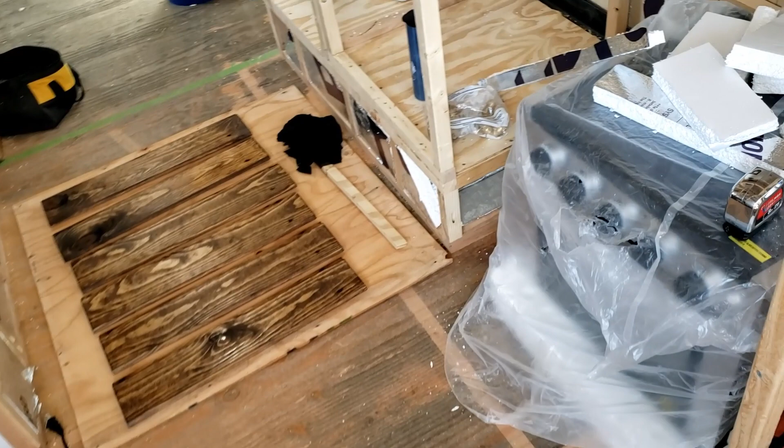Before I get started here, I've got to do some cleanup, so just figured I'd show you guys. This is the stained panels from the last episode. They've been sitting here drying for a couple days and they are looking good. Yeah, that looks great. I actually really like these dark spots over here. The plumbing's running from over here through the wall. That's our hot water heater. So it's going to run to that, and then past that, the shower goes here.

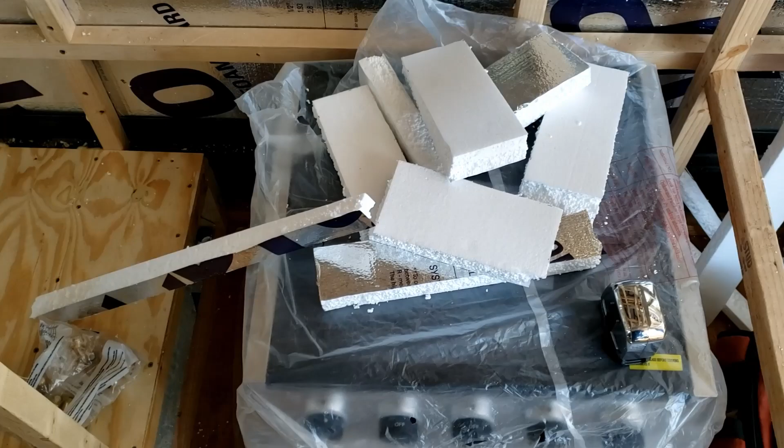So I've got some cleanup. I've got to move this oven. I've got to move these wood panels. But yeah, it'll go here. There'll probably be a run up to the shower head, which I still haven't determined yet. So I'll probably just put some T's somewhere in here that it will run up.

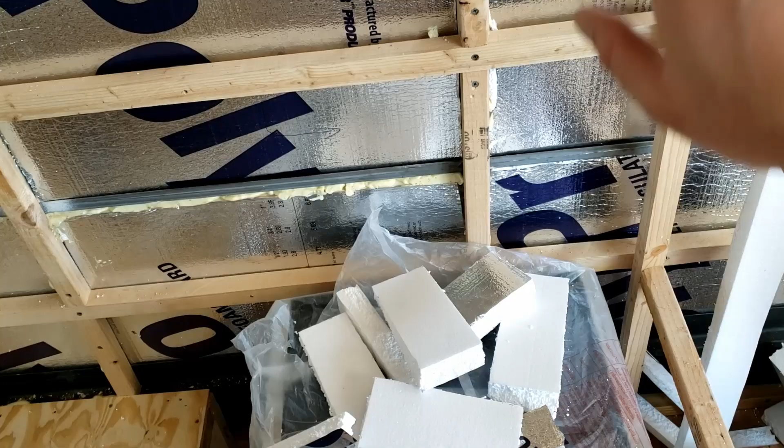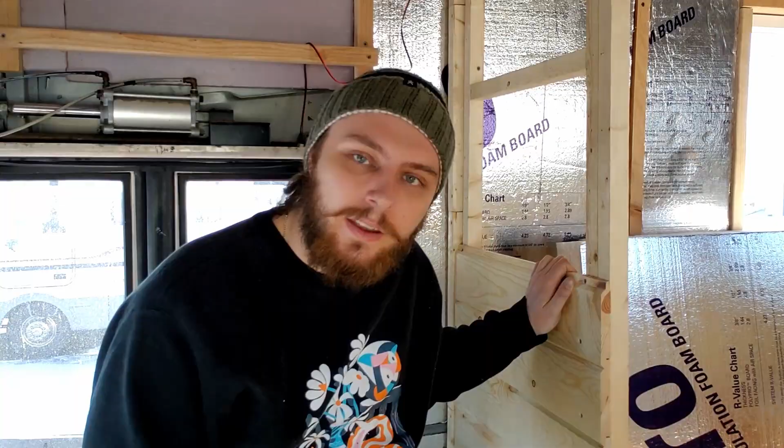We'll see. So I've got to do something with those panels I stained, so I'm going to just reinstall them in the place they go. They're not finished staining. I still have to stain the backside, but for now they need somewhere to stay, and I don't want them in my way. I don't want to bump into them or scratch them with my feet or anything. It'll be cool to see because I'll be able to see the contrast between this color and the stained color.

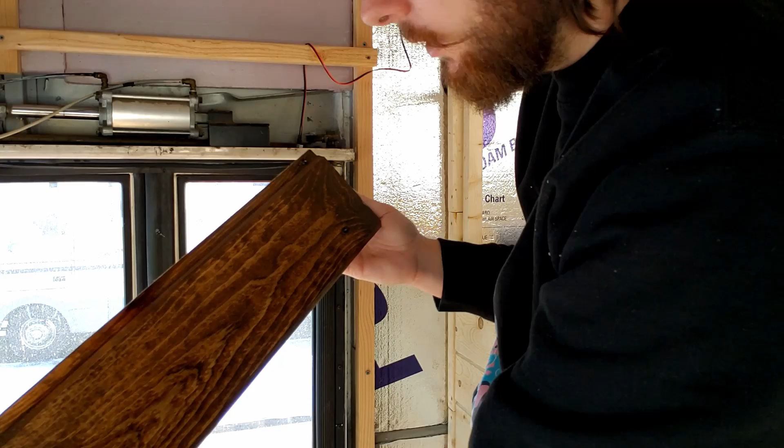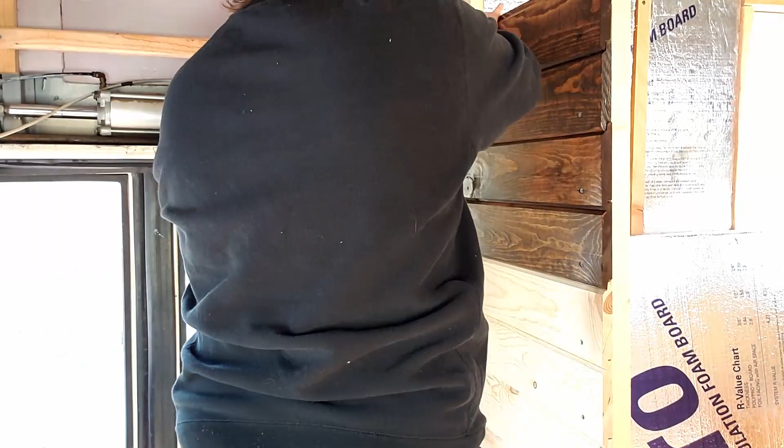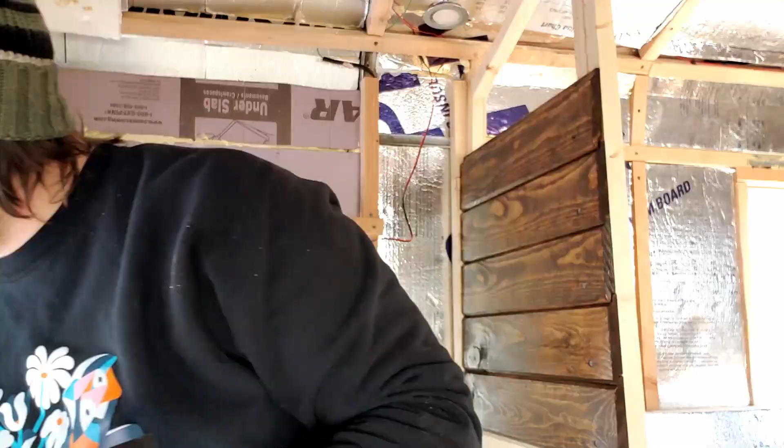Look at that. Already looking pretty good. All right, that looks pretty good. Let's see if I can get both colors here. Yeah.

So if you're watching and you see this, let me know what you think. Do you like the unstained or the stained version? I really like the stained version, and I've got a whole gallon of this stain, so I will probably stain a lot of it. But I mean, I'm open to not. So we'll see what happens.

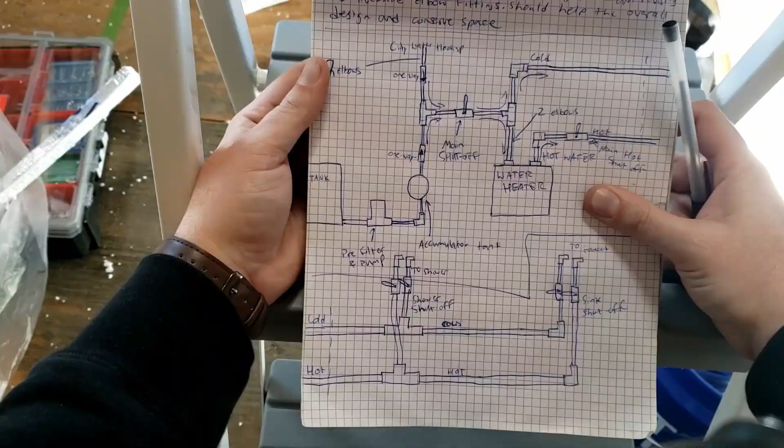So here's my plumbing diagram. I've looked up a lot of stuff on it and kind of wanted to draw my own. So I'll start at the beginning here. So we have the water tank, this is city water, this is the water tank. So if I'm somewhere where I can hook up to water, I can fill up the tank through here. It won't go this way, there'll be a separate thing linking to the tank.

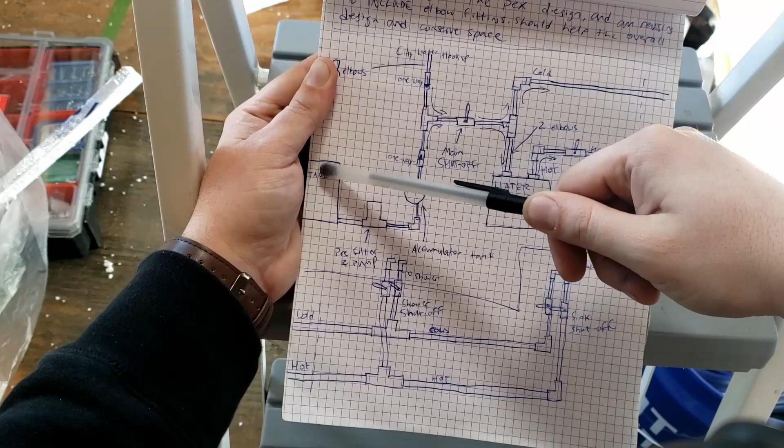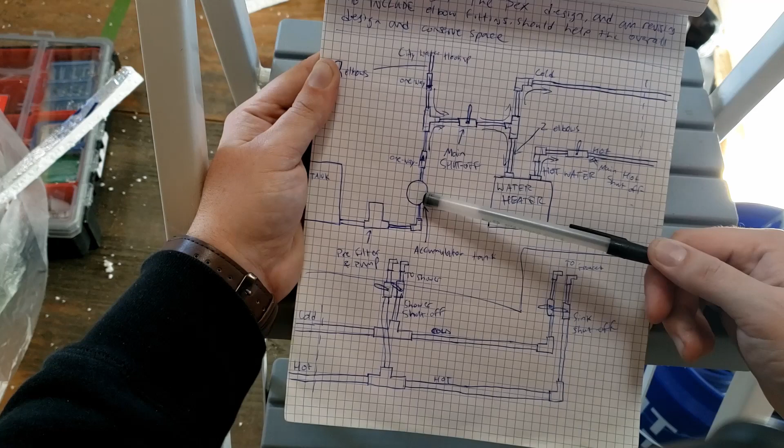Anyways, this is the pump and filter. So basically there's a filter that goes before the pump to prevent any particulates from damaging the pump. That gets attached to the pump. Got an elbow here. This is the accumulator tank. Basically what this does is it holds pressure so you constantly get the same amount of water pressure. Because the pump works in bursts, whereas when you turn on the faucet you don't want it to sputter when the water comes out. So this will keep it at a constant steady stream.

Then we have one-way fittings. These prevent water from going the opposite direction. So again, I've got the pump going into the accumulator tank, going one way. So the pump can only pump water this way. The reason that's here is because I've got city water too, and if I want to be hooked up to city water and not using the water in my water tank, you don't want the city water to pump backwards through your pump.

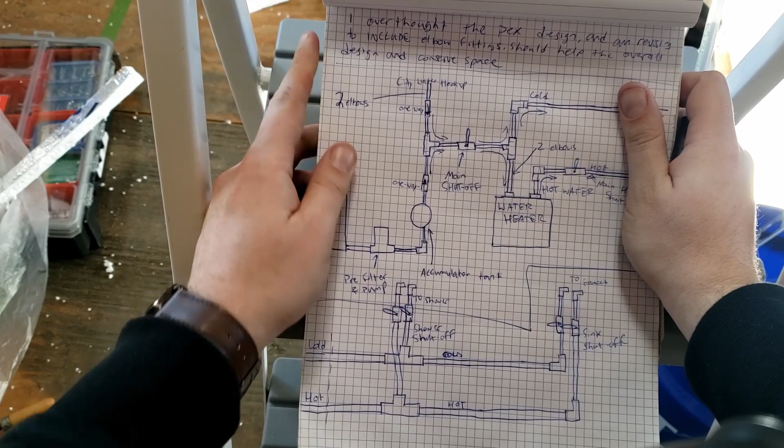So I've got a one-way here and then a T. And then here's the city water. I've got a one-way going in that way. So we have water coming from both directions, but they cannot go out. Now next is the main shutoff, which will just be a big turn valve. And then another T. This is just the cold spigot.

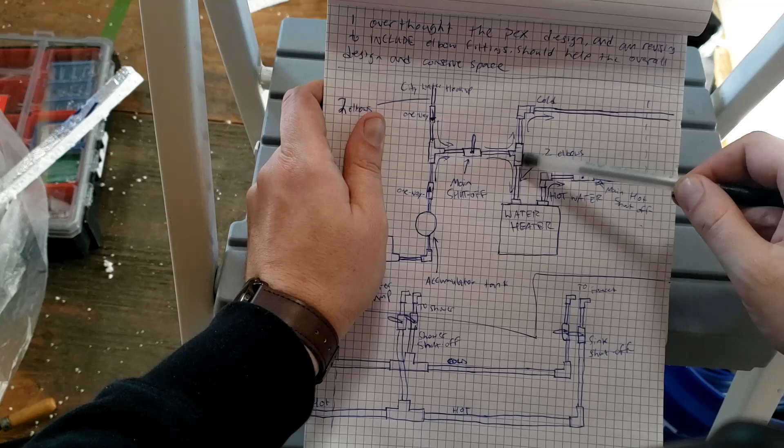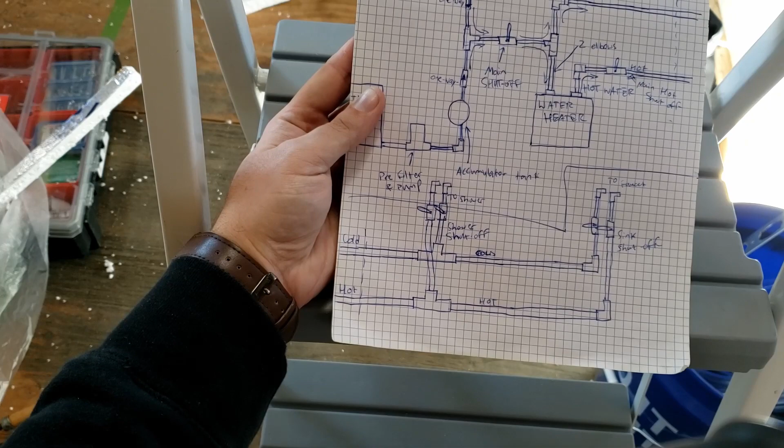So, you know, you got cold water coming, it goes through here or through here, sent to your sink and shower. The T here leads to the water heater. So cold water goes in, hot water comes out. I'll have a main hot shutoff. So we have a cold and hot water line. There's a T going up to the shower for both cold and hot. Elbows going to the sink with shutoff valves for both the shower and the sink. That's the plan anyways. Now it's time to execute.

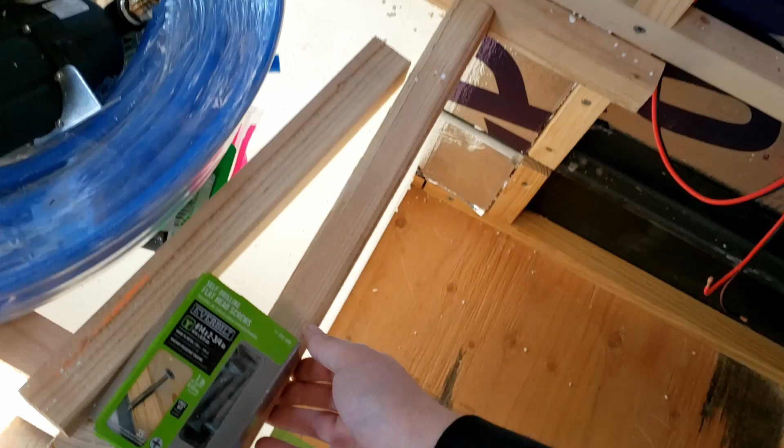The water tank is in, but it is not permanently installed. This is still loose. I haven't screwed it in yet because I need to spray foam insulation all the way down here. There's this rib, and I want to insulate everything so the tank does not experience any freezing. This is generally the area where the pump and accumulator will live. I haven't exactly figured out the layout for that yet, but that doesn't matter. We're not worrying about the plumbing here yet. What we're worrying about today is the plumbing going through the walls to the sink and the shower.

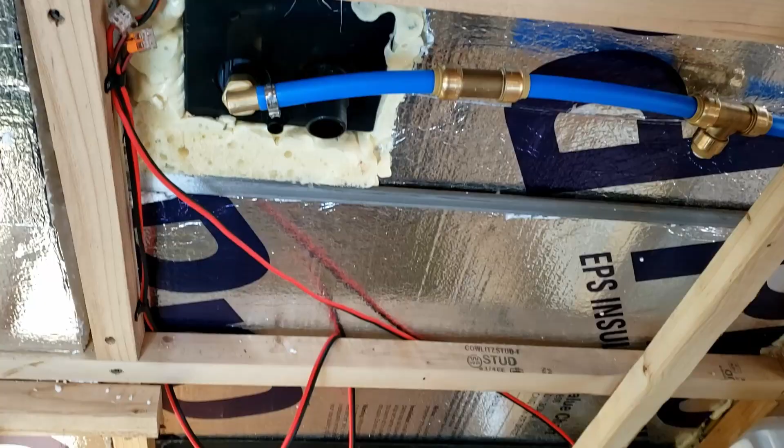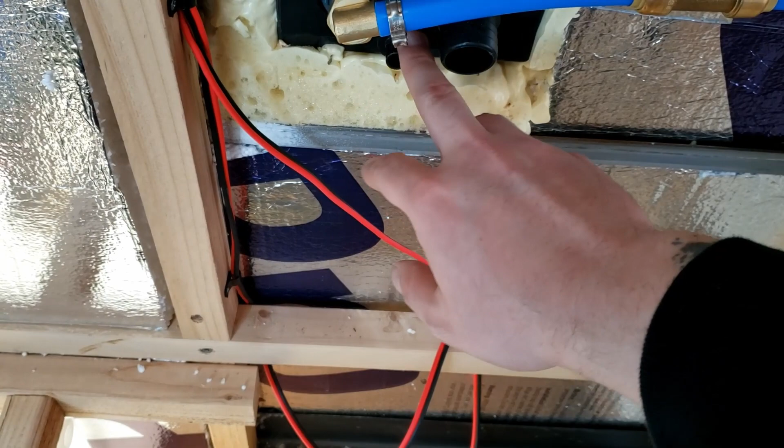This is my city water inlet. This is where you would hook up to get water just directly to your appliances. This is the tank fill inlet, so this will have a hose running down to the tank somewhere in the top to fill the tank. This is an air hose to let air in or out of the tank as you are using water from the tank. And this is the one-way valve, so this prevents water from going out. And this is where the city water and the tank water will meet. So we're not worrying about this right now, but when I get the pump hooked up, this is where the pump will go.

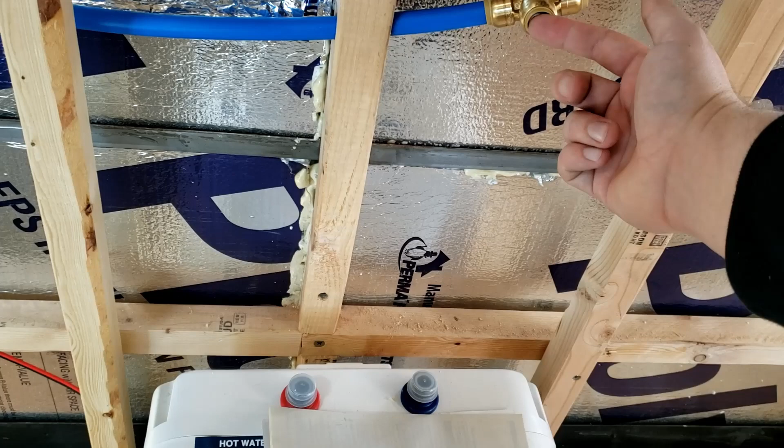Now if I scoot over, I've got more PEX running to another T, and this T will branch down to the water heater. So I want to get that done today. Get either just a tube of PEX running out of that T going down here, and then get another red PEX running up and get a separate water line running for the hot water. We will run it all the way across to here. This is where the shower will go, and keep going to here. And this is where the sink will be.

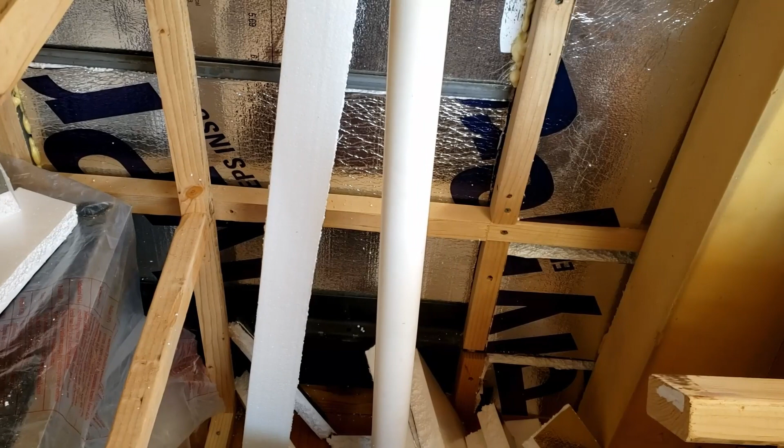I just wanted to say this to the camera instead of from behind the camera. I know there are a lot of YouTube Skoolies out there, or even Instagram or TikTok, and they really glorify the work, and all their photos, even the construction photos, look pretty. When you're building this and you don't know what you're doing, it's gonna be a mess. Like you can see, it's a work zone. I've got lumber and all this stuff. I'm just trying to give everyone a realistic view of what this is like, especially if you're working towards learning it all. Some people might want to clean up after every job. For the sake of efficiency and not wasting my energy, I don't clean up very much because I'm going to end up cleaning it all up again and again. I guess I'm just trying to say, excuse the mess. The mess just means progress.

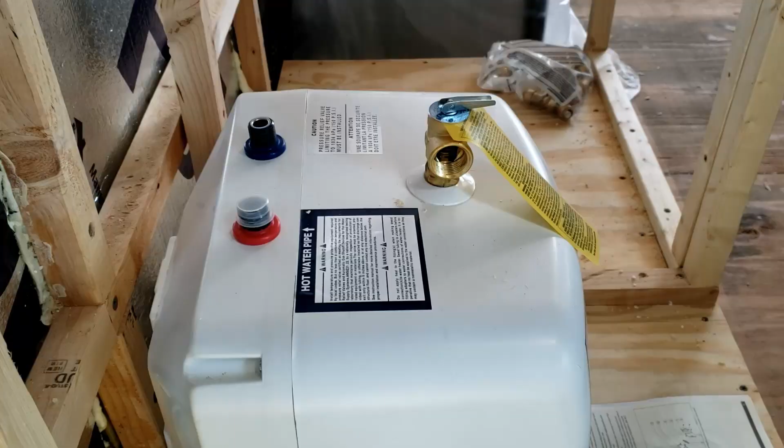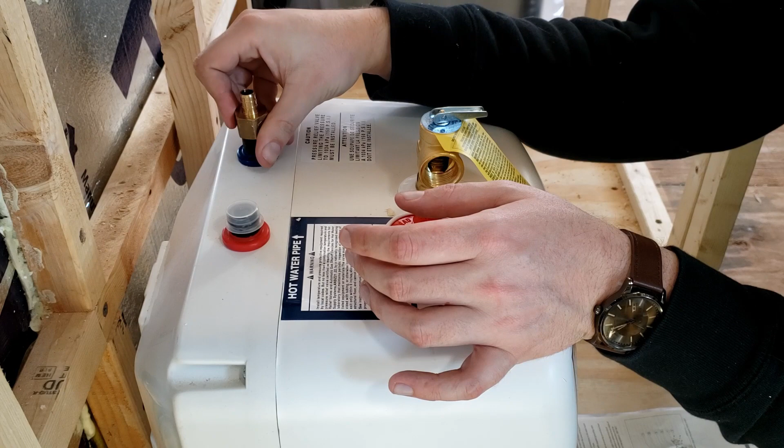Okay, so the first order of business is getting water down into the hot water tank, hot water heater, and it basically screws on over here, and that creates something for the PEX to go into. You're supposed to use pipe thread sealing tape. It's a plumber's tape.

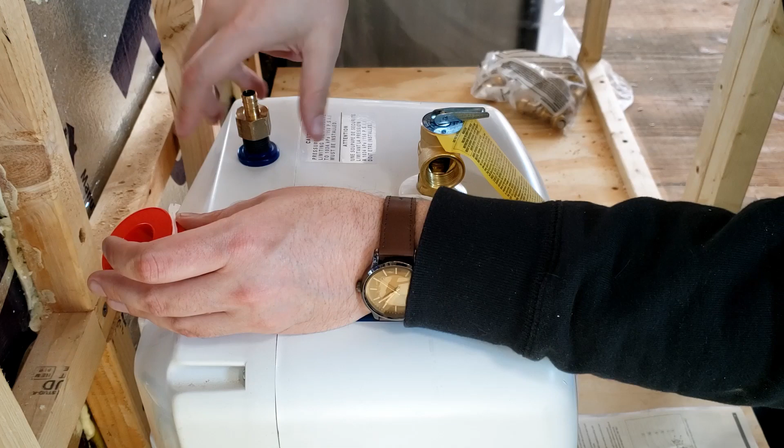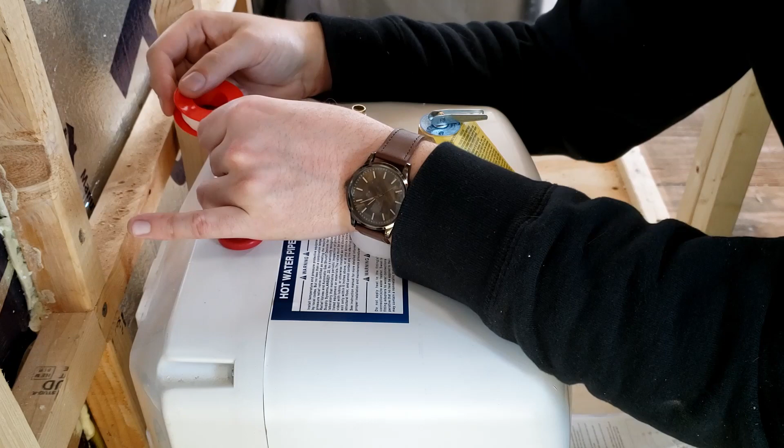The correct way to do this, I believe, is you're tightening this righty-tighty. So you're going to wrap this stuff around the threads. You have to think about when this gets turned, is it going to tighten the tape onto it or loosen it? You want it to tighten it, not make it come undone. So we're going to go righty-tighty with the tape. Just break it. There. And that should create a watertight seal around this, which I will now have to tighten with a pair of pliers.

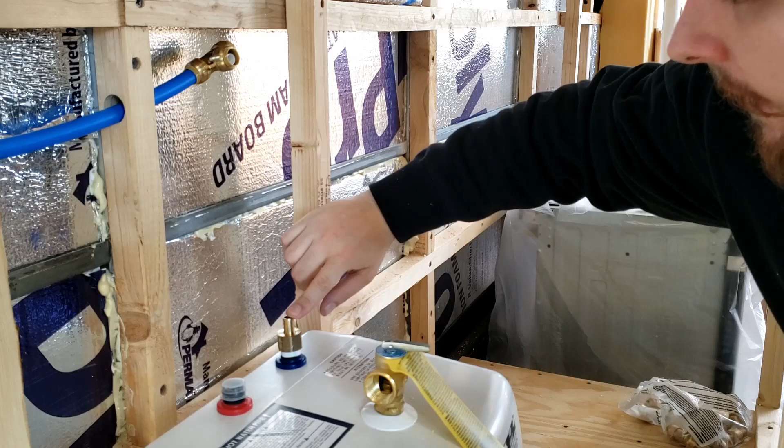Okay. All right, so now I have to run PEX from here to here. So I bought these elbows, and my thought was I could just run a small piece of PEX here to the elbow, and then run one straight down to the water. And the cool thing about these SharkBite fittings is they can rotate pretty much freely after they're installed, and it doesn't leak. I guess what I'll do is I'll measure from here to the edge of this: 5 inches.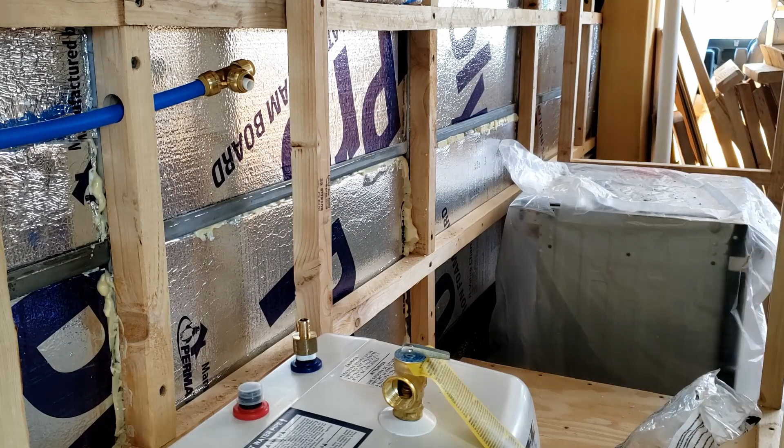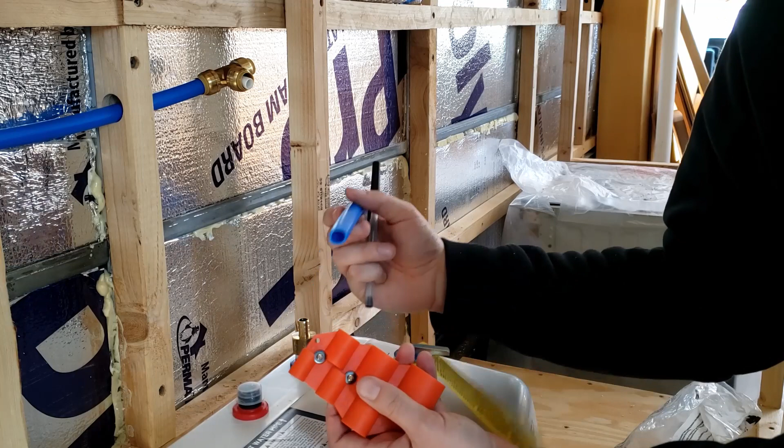So 5 inches of PEX, plus I also need to account for the depth of this piece, because the PEX is going to go inside of this and lock. And I believe it's like 1 inch. This is a PEX tool that you use to deburr and mark your PEX after you cut it. I've got this loose piece of PEX here and this deburring tool, and what you do is you put it in here, and there's little blades, and you're supposed to twist it, and it removes any burrs from the PEX.

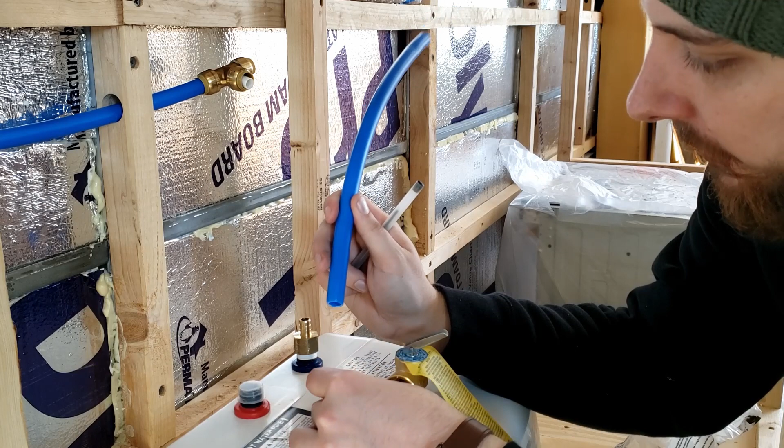But then what you're also supposed to do is take a pen or a marker and mark the depth. And then when you put it through into one of these SharkBite fittings, as long as you get up to that line, you know you've installed it correctly. So it's just a little under 1 inch. So we'll call it 1 inch. Luckily I've got some extra PEX, so I'm going to cut 6 inches, and then I'll kind of hold it up here and see how that looks.

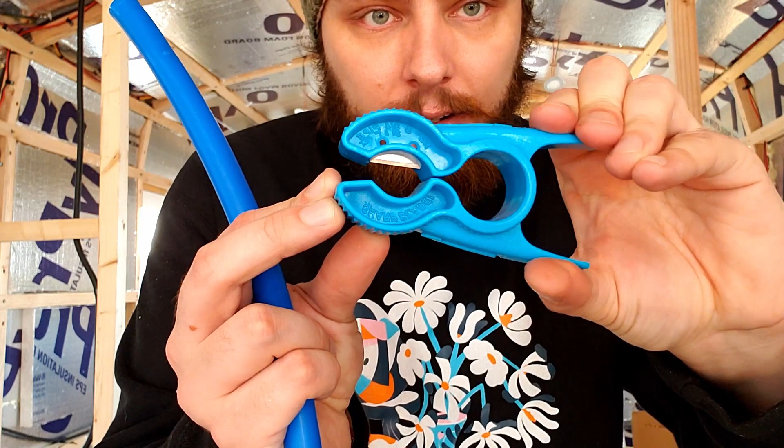Okay, so we're going to go ahead and cut a piece of PEX here. I've already got a scrap piece that I'm going to try and use for this small 6-inch cut. And I just wanted to show you guys a couple different options for cutting PEX. This is a razor blade PEX cutter, and you can see it's got a razor blade, it's got this lever, great place to chop a finger off, don't do that. And I hate this thing.

This thing sucks. I'll show you why I hate it, but what I've been using instead is a sharp pair of big wire cutters. This is what I use to cut the heavy gauge wire for my battery bank. It does a really good job. It does leave little burrs, which is why I have that other tool for deburring the PEX.

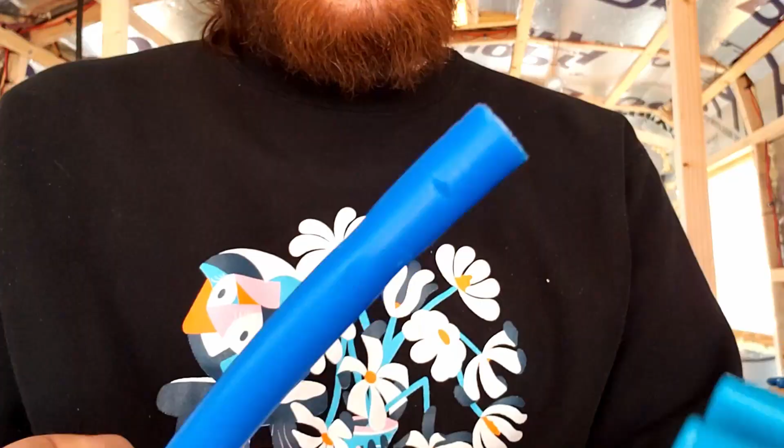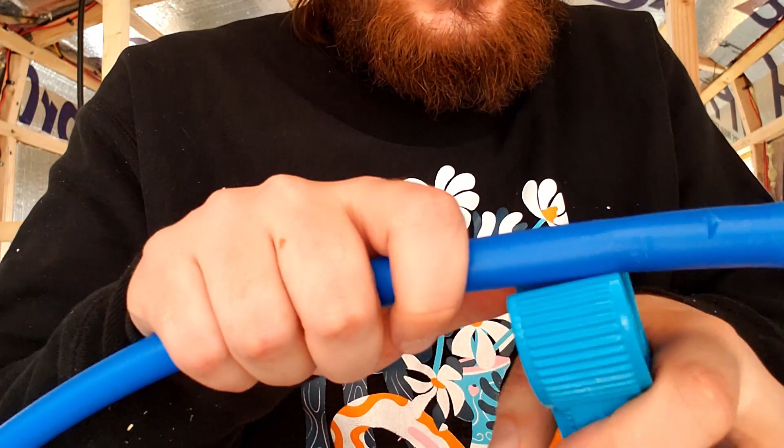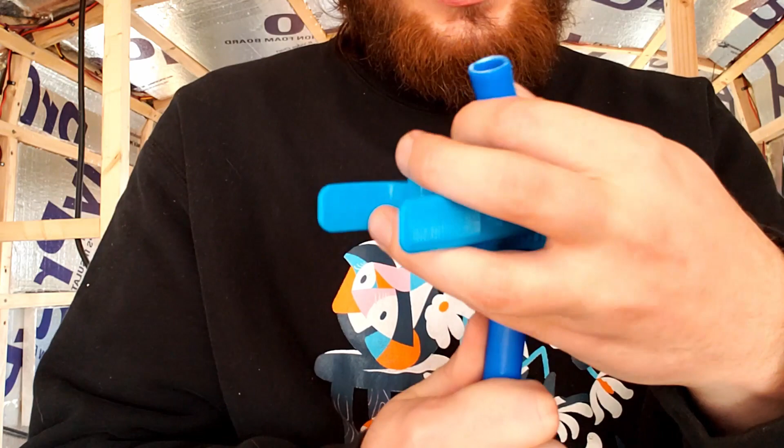What you're supposed to do with this is find your line, draw your line on this, and then you're just supposed to line up your line with the blade inside, and you put it in like that, and then the arrow is the direction that you're supposed to rotate. So you rotate it the direction of the arrow, and you can see there's another arrow on the other side, and you're just supposed to go around a couple times until it cuts through. And wow, that actually worked really well.

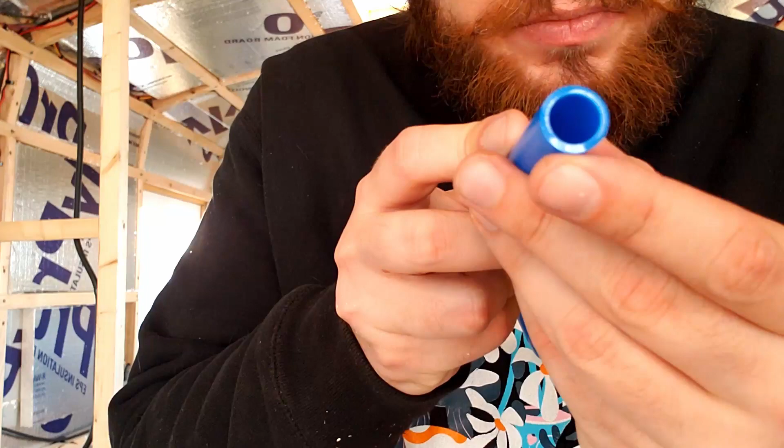My problem with this in the past is that I'd go to cut it, and if it's not perfectly perpendicular to the blade, like a perfect 90-degree angle, then it would cut like a spring. It would just keep cutting and cutting because it's cutting at an angle. Now, you can see that cut does look pretty good. Everything I read online said to use a very sharp razor blade, and that's pretty good compared to this end. And this end is an end I cut with the wire cutters.

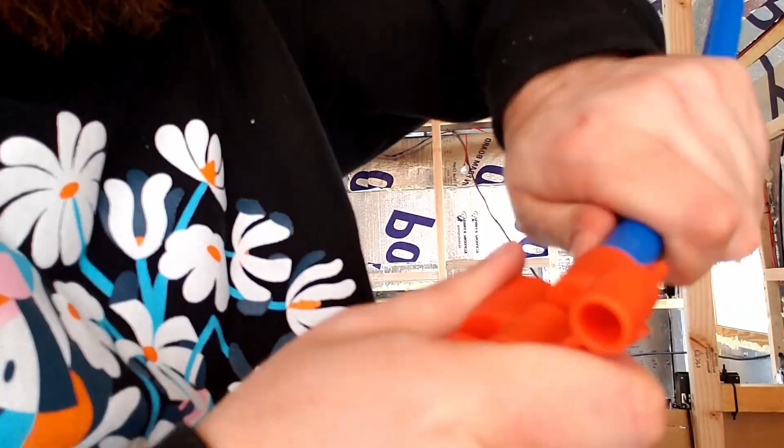All I did with this was line up my line and cut. It's not quite as clean as you'd want it to be. Come on. But that's what this is for. You're supposed to use this every time you cut, no matter what you use. But you put it in the 1/2 inch side. You twist it. So I twist it and I push down while I'm twisting. And you can kind of see it shaving off the edge there. And that's supposed to create a nice edge for the fitting to grab onto.

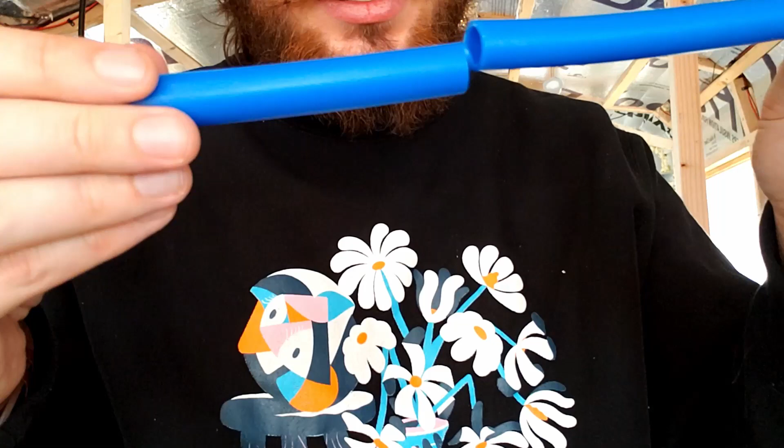And I'll go ahead and mark at 6 inches. Okay. Hopefully it works. Do a twist. Yeah, so it's giving me this problem. Oh. Alright. And this is why I don't like this thing. Because you can see it cut it at an angle.

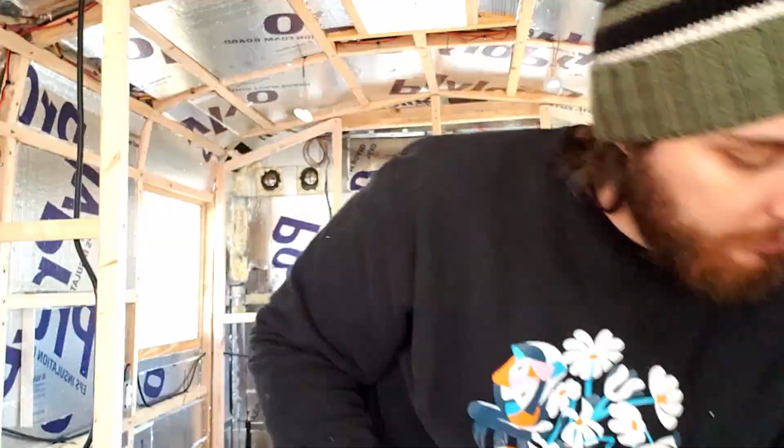Yeah, no, that's just... Alright, scrap that. Good thing I've got a spare piece here, so let's see. There's some marks on there, which means that I did have a fitting on this at one point. So I'm just gonna cut that off. Try and get a clean cut here.

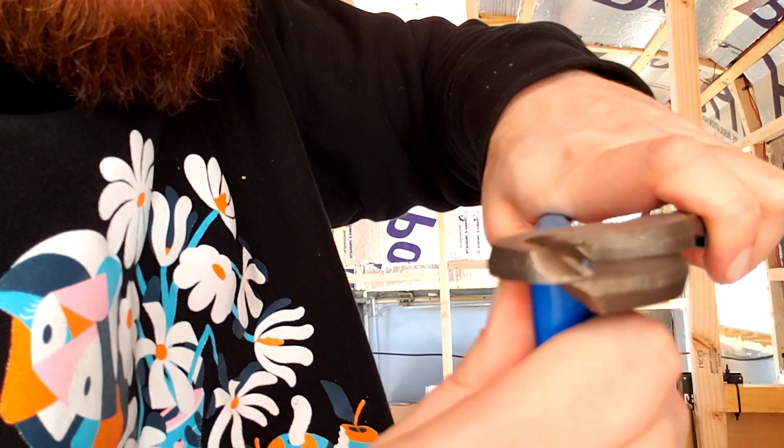And also what I've been doing is just taking it and, if it's not a perfectly square cut, just kind of shaving bits off until it's just about good, and then I can put it through that little Pex tool. We're really going to find out once it's warm enough to actually pump water, but for now, I think that'll do. And we'll just cut on the mark. Ta-da! And there's my 6 1/4 piece.

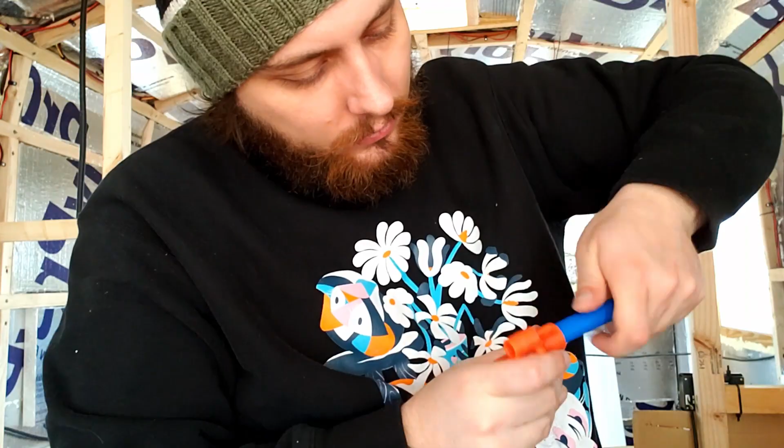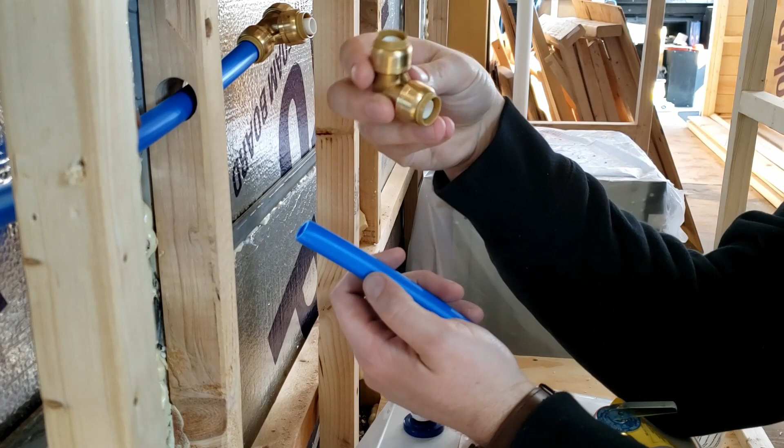So, just looking at that, if that's right there, and then I have an elbow, which will also be just about that deep, that's going to be more than enough room for this. Okay, so just got it pushed all the way in, go all the way around with a pen. You take the Pex, you take the elbow, or you take whatever fitting, the SharkBite fitting, and you put it in.

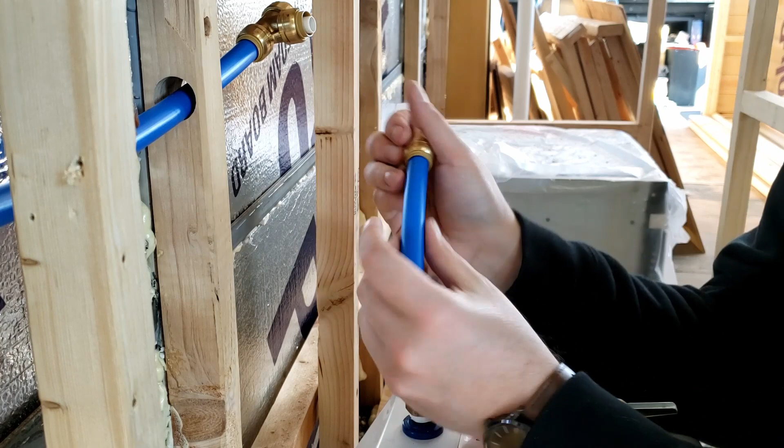And sometimes they don't like to go in all the way. And then you press, and you press firmly, and make sure you get all the way down to that line you drew. So the same thing with this end. It'll go in and go all the way in. You kind of have to push hard, but once you got it, it's not coming out.

11 inches. I've got my piece cut. We'll put it in here, and we'll mark the spot. And we'll pop it in. Come on, there we go. And that should be good, and then I should just be able to... Come on, there we go. So there's that. So we have this tee.

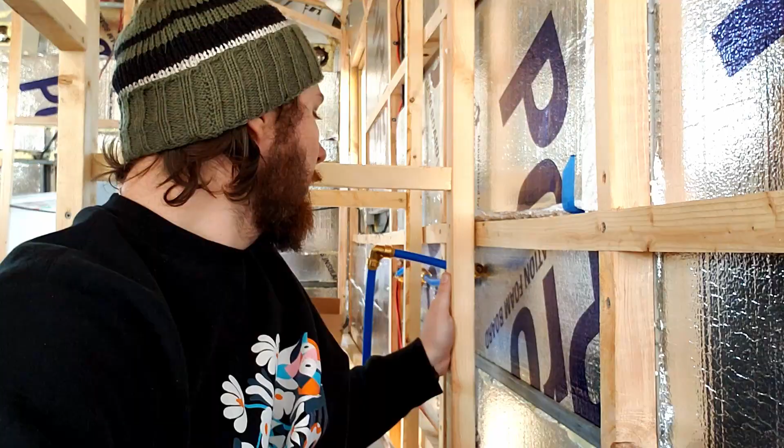Got the hot, or I'll have the cold water coming through here. I'm gonna have to drill a hole through this stud for the pipe. I'm also going to have hot water coming through here. So I'll have to drill 2 holes next to each other so the Pex hot and the Pex cold can run alongside each other. And this wall, I don't believe there's anything there.

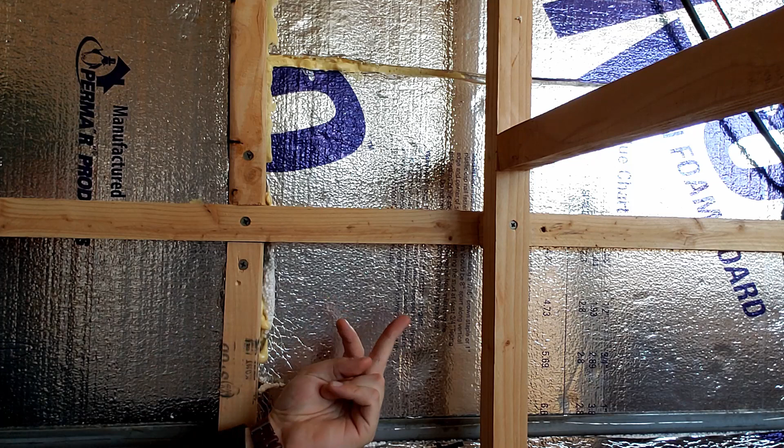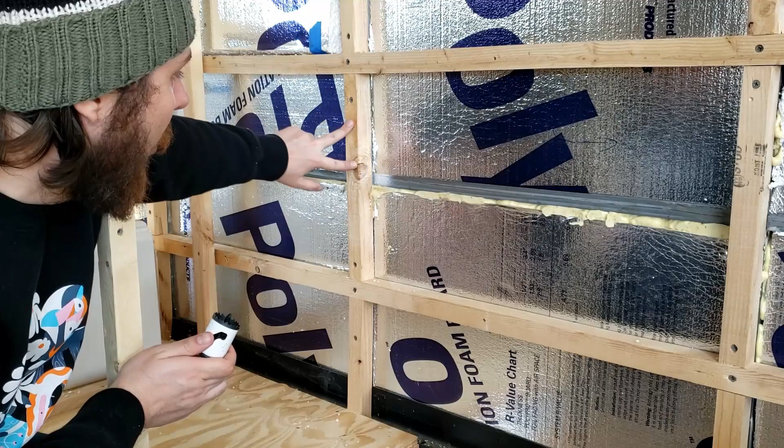What I'm going to do instead, so the Pex will run through here, hot and cold, and then I'll have a tee that sends the hot water and the cold water up into this corner for the shower head at the top. So before I can run the Pex, I have to drill holes for the Pex to go in. So I've got this 1.5 inch hole saw. I might actually have a smaller one, but I'm going to drill 2 holes, one for hot, one for cold. And then again here, one for hot, one for cold. And then we'll be in business.

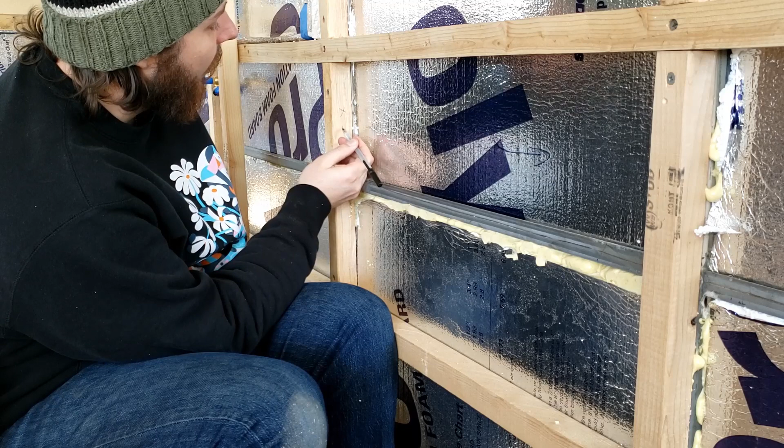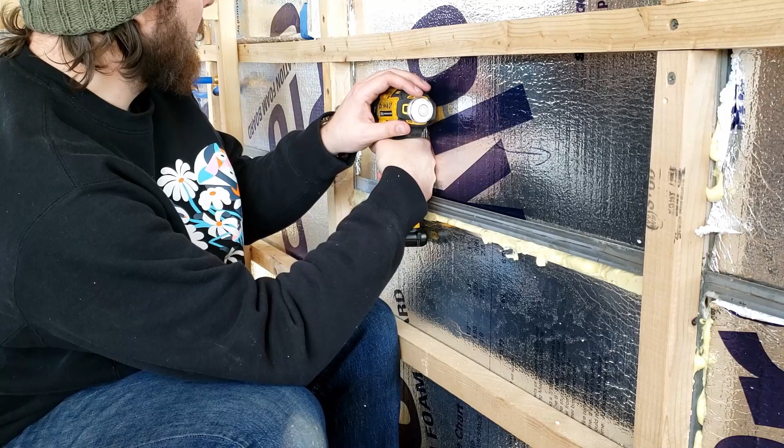I have to avoid these screws that are holding the studs into the wall. So I think what I'll do is I'll put the first one here just below the screw, and then I'll probably measure, I don't know, like a 1/2 inch or an inch between the two, just so there's enough structure to hold them. And wear eye protection.

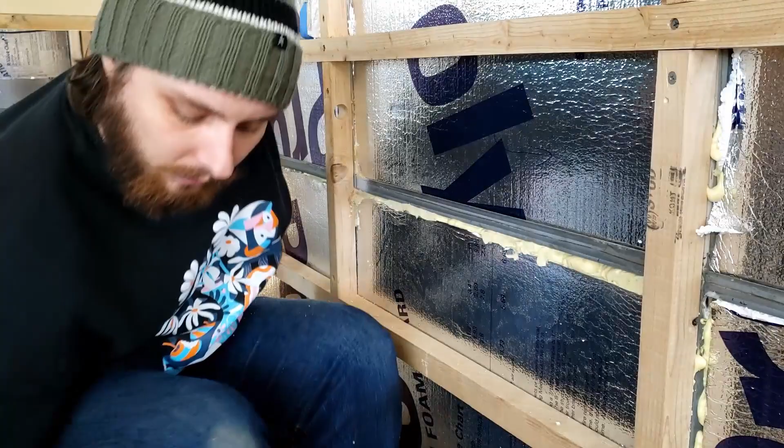Okay, got all covered in sawdust here, but that's a nice looking hole. You know what, let's give it like 1.5 inches. So we'll go from the bottom here. 1.5 inches is right there. So we'll put the hole right where that X is.

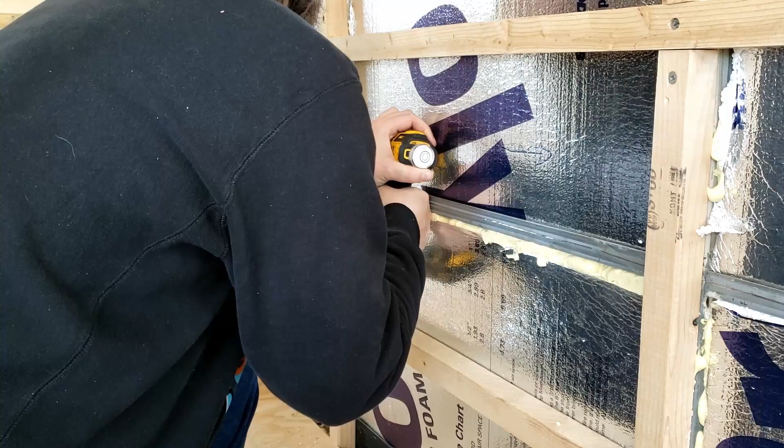So now I'll go ahead and drill the corresponding holes on this side, and just to keep everything straight and uniform, I'll measure to the center here. And that first one from the top is about 3 1/8 of an inch to the center of the hole. So I'll make my mark here, 3 1/8, and that's where my hole is.

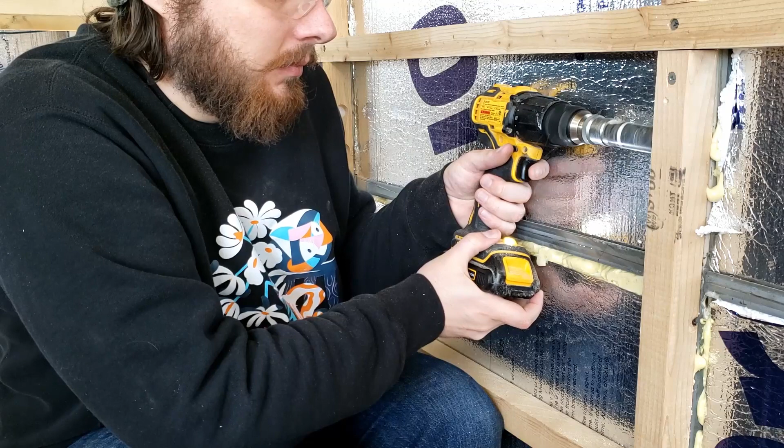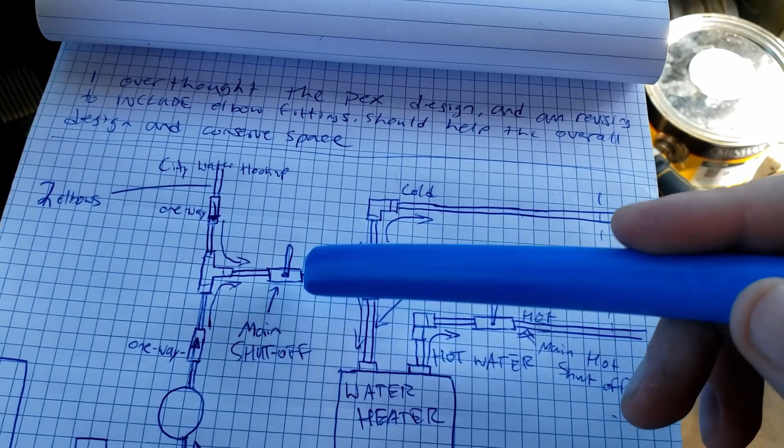Alright, so I'm taking a look at my diagram here, and I already realized that I messed up. So shame on me. I wanted a main shutoff valve before the water heater, and I failed to install that. So I guess I have to correct this problem. So let's figure out where I'm putting the main water shutoff. Comparing this to my design, the main water shutoff should be right here, because we'll have water coming in from the city, water coming in from my pump. If I want to shut off all of it, it goes right there.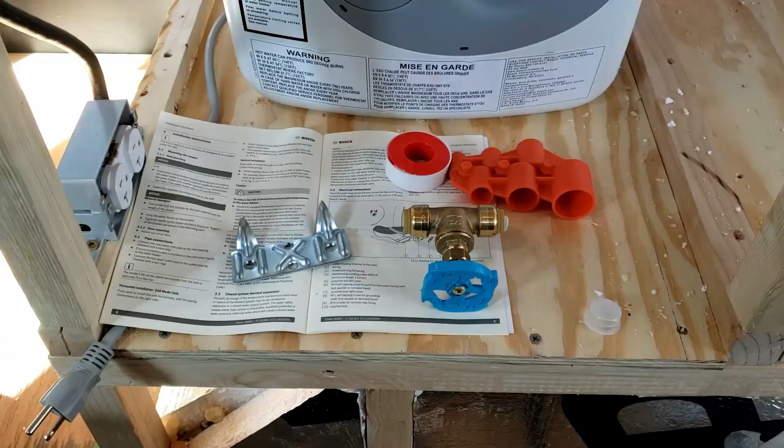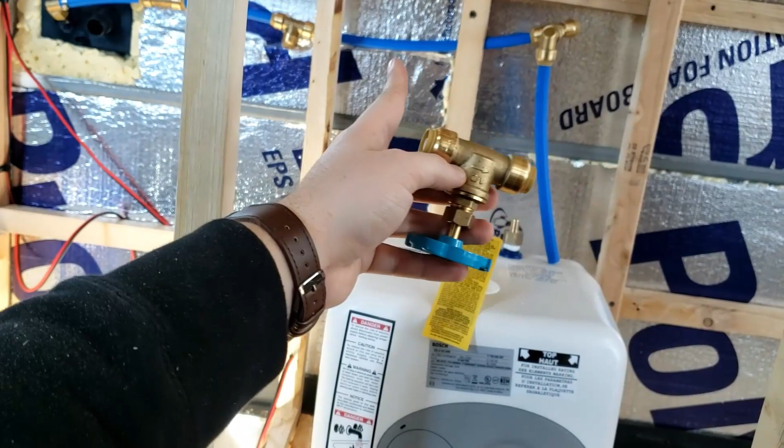So here's what I'm going to do. I'm going to measure this. And it's about 3 inches. Now, we're going about 1 inch in for each one, which means that I have to cut 1 inch off, and then the SharkBite should just go in. There we go. Now you push tight. There we go.

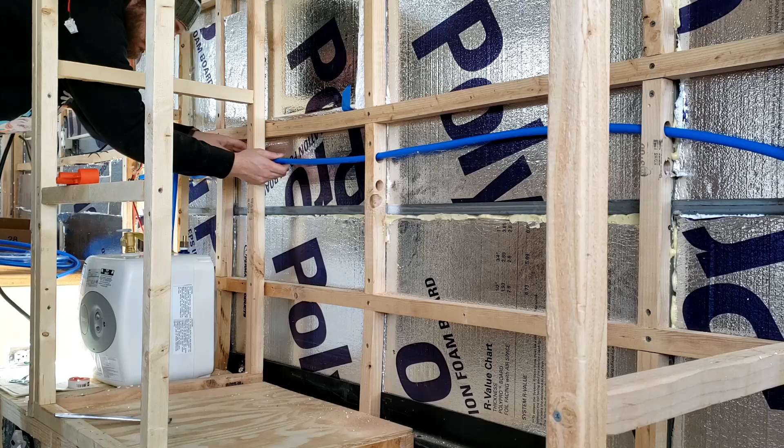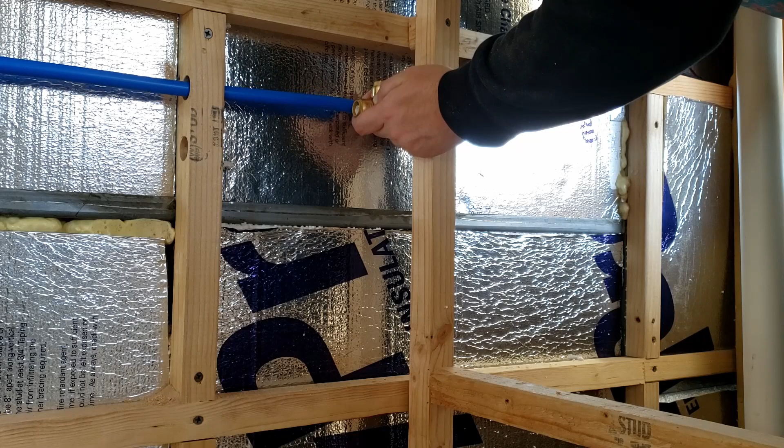So now, this T will go here to send cold up to the shower head. So I've got to cut this right there. Okay. It's as easy as that.

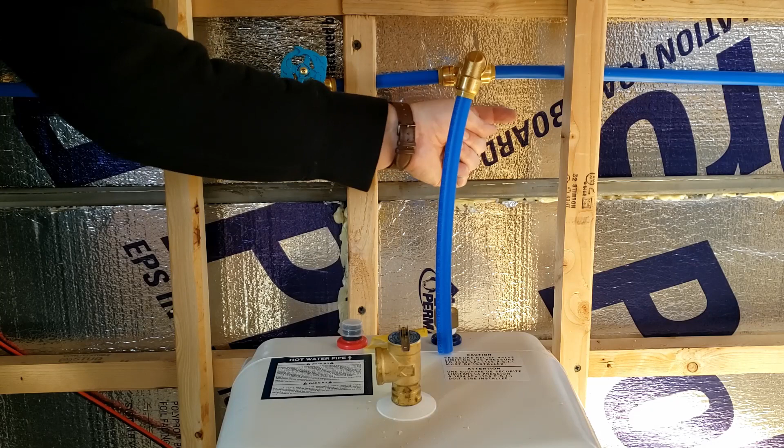So, for my hot water, it's going to come up and we're going to have an elbow like this one. It'll start lower because the hot water is going to run below the cold water here. And what I'm going to do is I'll have the elbow, and then it'll go here, and then I'll have the shutoff for the hot water right here.

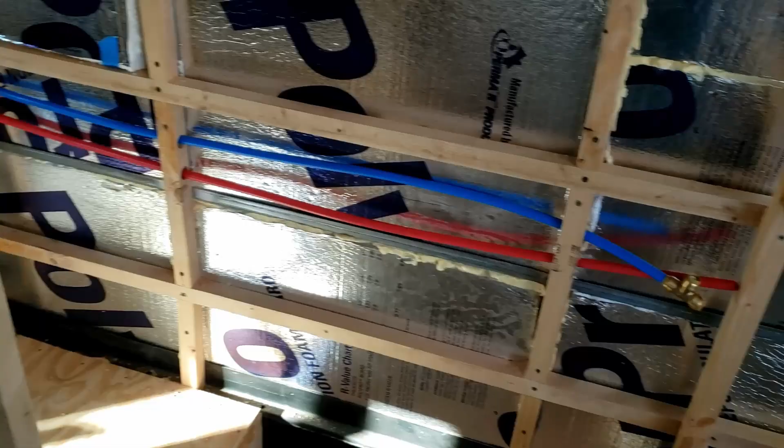So unfortunately the time lapse got cut short because I ran out of room on the camera. I need to clear out the SD card, but I did delete some stuff so I can show you guys this here. We've got hot water going down. There's the cold water. I've actually just loosely attached it to the heater for now. This is actually surprisingly rigid and sturdy once it's attached to something. But anyways, I ran the line all the way to here. I'm going to install that T.

Okay, so I did have to go to the hardware store. I went ahead and grabbed a new T connector for the hot water because I realized I was short one. And I also got the threaded fitting for the hot water output on the hot water heater. So I'm going to wrap this up. And then I'm going to put in a few panels of insulation while I still have daylight. I've still got a couple hours here at the bus, so let's get to it.

You can see I've got the fitting on there on both hot and cold. There's the hot, there's the off for the hot, the off for the cold. And the PEX runs across. Got these two T's here for the shower. That will be going up. And it runs all the way over here. Got both hot and cold for the sink. So for now, that's enough plumbing until I can decide exactly what I'm doing with the shower heads and till I understand what I need to do for the sink.

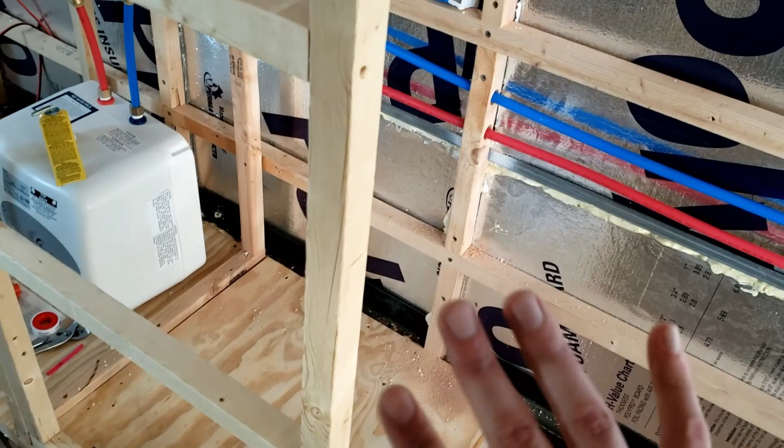I've been waiting to get this plumbing done before I could insulate. Now I know where the plumbing is in the wall, so go ahead and insulate everything around. The biggest spot that I want to insulate is this metal, because it's connected to the frame of the bus, which means if it's cold outside, that metal is just as cold as it is outside, and I don't want that cold temperature anywhere near my plumbing.

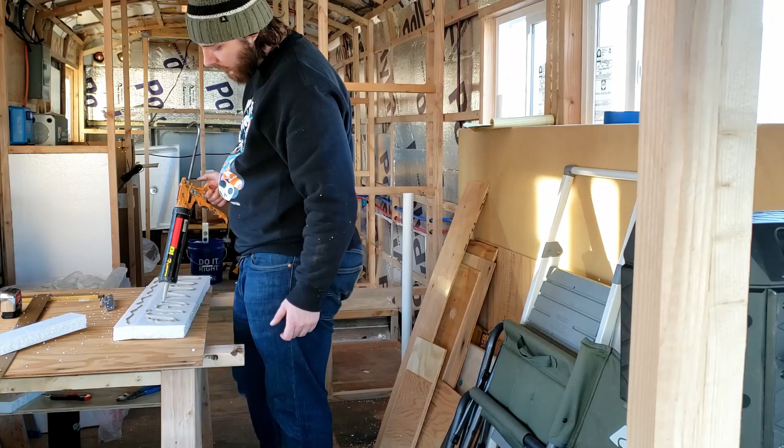Well, the sun is setting here on another day, and I gotta get home. I gotta eat some food, and I'll be back here in a couple days. Unfortunately, I was not able to finish all of the insulation, mainly due to going back and forth between the house and the bus and then the hardware store again.